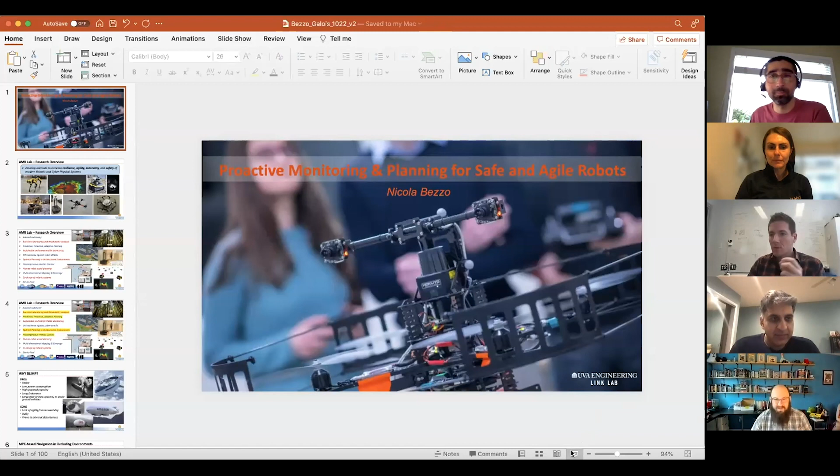Nicola, you are first. By the way, before we start, I kind of want to apologize, but my voice is a little bit scratchy, so I'm gonna sound a little bit like an old man today because I have a little bit of a cold. It's not COVID, so that's good news, but still, okay.

So, okay, great, thank you everybody for having me presenting today. Although I don't work on blimps, a lot of research we do in my group actually relates a lot to some of the problems we discussed yesterday. So I'm going to go over some of the core things we've been doing recently that fit very well with what could be work, for example, on blimps.

Let me first give you a quick overview about what we do in my laboratory. I'm going to minimize this so I can see. So with my group, we work in robotics.

We are primarily working on motion planning. The whole goal of my team is to increase autonomy of autonomous systems, to make them more resilient, agile, and safe as they move through different types of environments and deal with different types of problems, could be cyber attacks, or could be disturbances or failures. In this slide you see some of the robots we're using, and in the next slide I'm going to show some applications, some related to Spot, some related to aerial vehicles. We'll see how much I'm able to cover in half an hour.

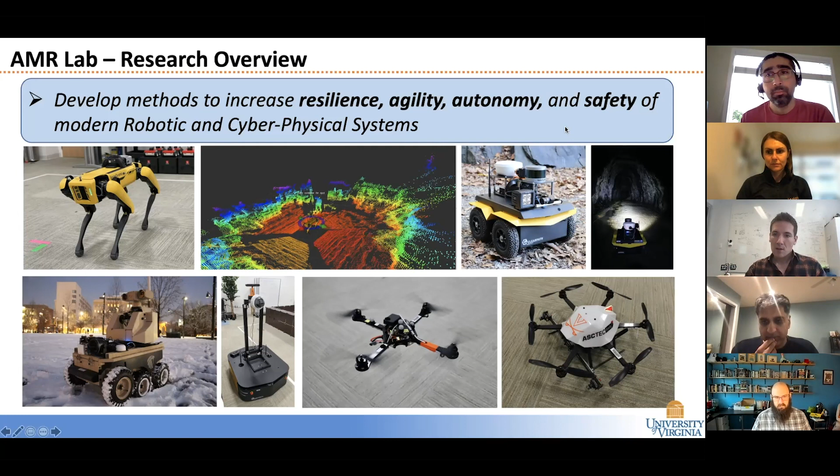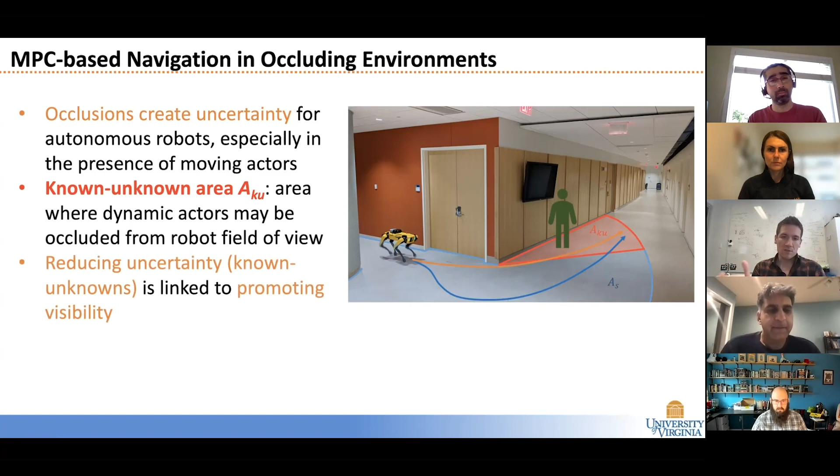So you can think, for example, that if it's the middle of the night, the robot could cut through this corner. But if it's a busy time of day, perhaps a better motion would be to promote visibility, to move in a way so that you gain more visibility around corners. So the idea is that if you want to reduce uncertainties, this is also linked to promoting visibility.

We would like to create a strategy that can do that autonomously, so the vehicle is able to deal with any type of environment. So that's the problem: how we can combine safety, visibility, and speed to make a robot more agile and able to deal with this problem you encounter in cluttered environments.

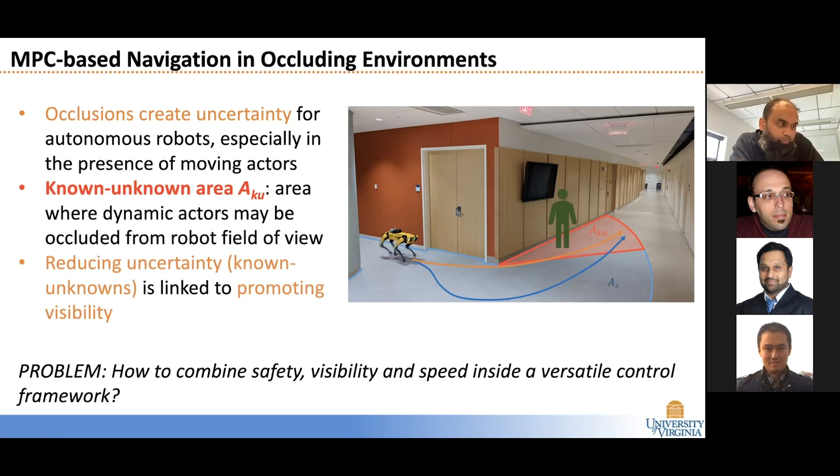So the first attempt to solve this problem, to minimize this known unknown area, was to use MPC. We've been talking a little bit about MPC, but the idea is that we have two competing objectives in this specific formulation.

We have one objective that is to make the robot go faster. By changing this waypoint, you can modulate the velocity at which the robot moves through the environment. Then we have this extra term added to the cost function, which tries to increase visibility around occlusions. In this specific case, that was dependent on the corners you encounter in an indoor environment.

So the first work we did on this topic was, again, focusing on indoor environments where we have corners, and trying to see if we could leverage the corner to approximate this known unknown area. We found a function that approximates really well this area that's being found whenever the robot is moving around, this known unknown area.

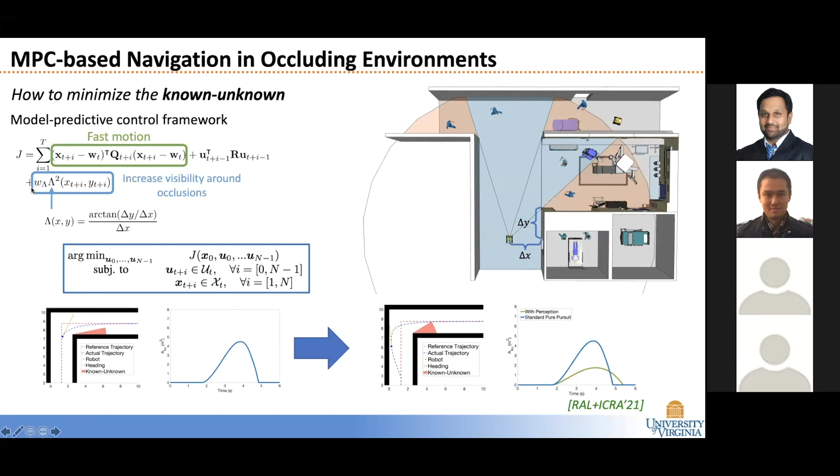Anyway, if you run this model predictive controller, that's the overall effect you obtain. If you don't do anything, if you put the weight for this visibility term very low, the robot just doesn't care, it just goes around as any other robot does right now.

By adding this visibility constraint, you see that the vehicle actually does what we like: it's able to scooch over, it's able to actually change its path. And while it's doing that, as you can see from this graph, it's actually lowering this known unknown area. So with respect to the other simulation, you see that the vehicle is able to improve the situation.

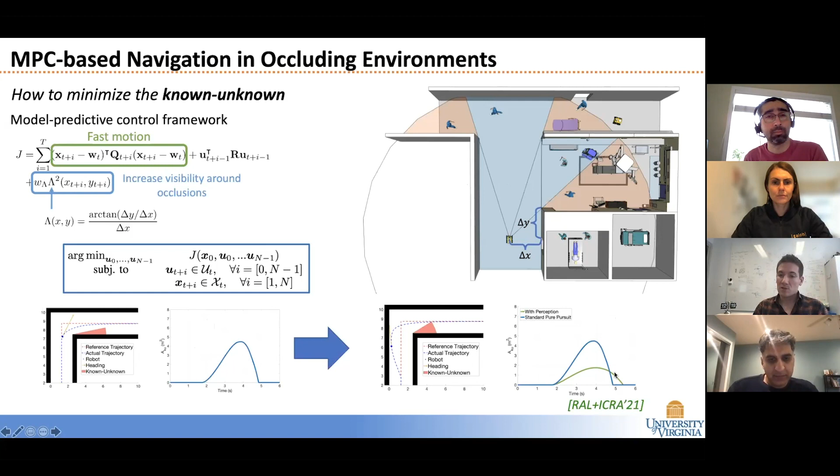To deal also with the unknown, we build an occupancy likelihood around the corners. So we build a model that tells us how likely it is that there is a person around the corner. This model is probabilistic, using an occupancy grid mapping technique.

At the end of the day, what we're trying to do is bring a model that tells us if somebody is there or not, which could depend on the time of day or previous notions of your environment. Based on these probabilities, we can find the expected distance to collisions, and since we know the dynamics of our system, we want to make sure the system can stop or react from any point if a person pops up from that corner. Based on that stopping distance, if violated, we adjust the weight of our MPC so we can move with more agility around these occlusions.

Let me show you an example. In this part where it's white, everything is safe, we're assuming there's no problem, no people around, it's known that everything is safe. But when we reach this corridor, we know there can be people that can cut through this corner.

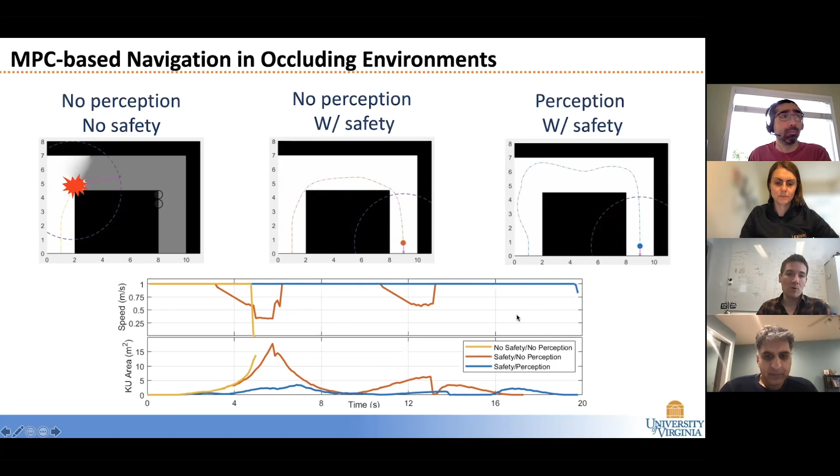This again is the same case as before, but now with perception. Again, we see that we're able to improve visibility, the known unknown area gets reduced, and the speed for this last one also gets improved. We can go a little bit faster around the corners.

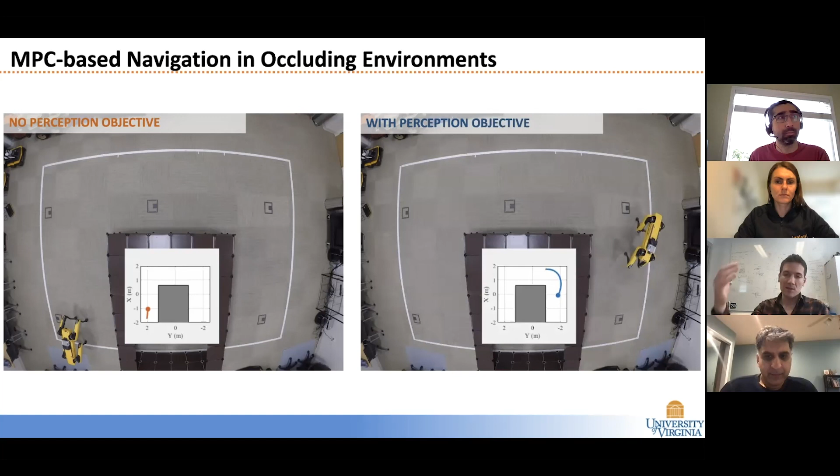If we add perception, you see that spot is able to figure out that it needs to take a longer path so it can see better around this corner. By doing that, it's also able to maintain safer and more agile motions in this cluttered environment.

So this, again, is an example of how we can deal with occlusions, and this can be applied to any type of vehicle. But the way we're moving forward on this research is to include more vehicles.

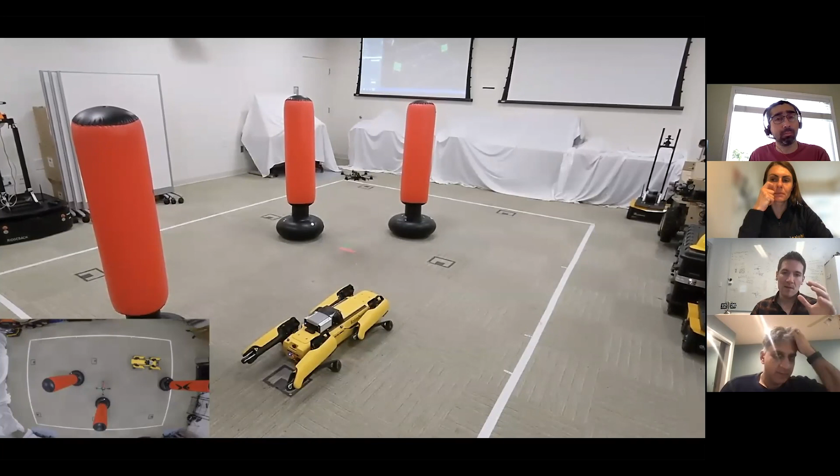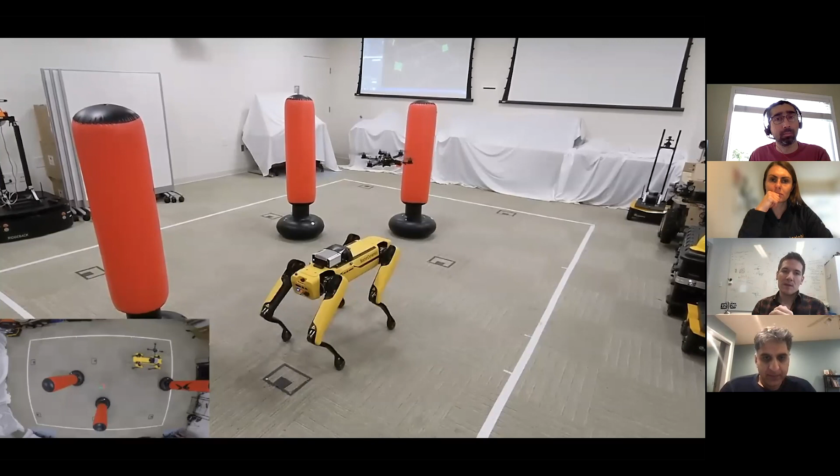So instead of only one vehicle, what we're thinking is something like this. This is just a prototype, not finalized, but the idea is: can we have, for example, a quadrotor that can move forward and provide some information to the ground vehicle that is in the back?

In this case, we are not doing that yet, it's just following, because we're prototyping this behavior. But the overall idea would be: can we have an aerial vehicle that moves a little bit faster in front of the vehicle and provides information about, for example, is there anybody around this corner, or is there any object? Then we can pass some of that to the ground vehicle, so it's able to be prepared and proactive as it's taking these corners and moving around.

So you could think, for example, that instead of a quadrotor, you could have a blimp flying way above that's able to inspect a larger area, so it can inform the ground vehicle about possible other vehicles or things around these occlusions.

Building on this idea of having multiple vehicles, we've actually been doing something applicable to blimps. It's similar to what I was talking about, but the idea is: can we have a ground vehicle, or a base station, or a blimp, that can assist an aerial vehicle or any other vehicle with limited capabilities as it's moving through a cluttered environment?

So the idea is the following: we have, for example, this aerial vehicle, this drone, that is trying to move through a cluttered environment.

And it can use only local field of view, so it's limited in what it can do. And because of that, it typically tends to move slowly if you're trying to move this vehicle through a cluttered environment. So the idea we would like to enforce here is, can we actually use a base station?

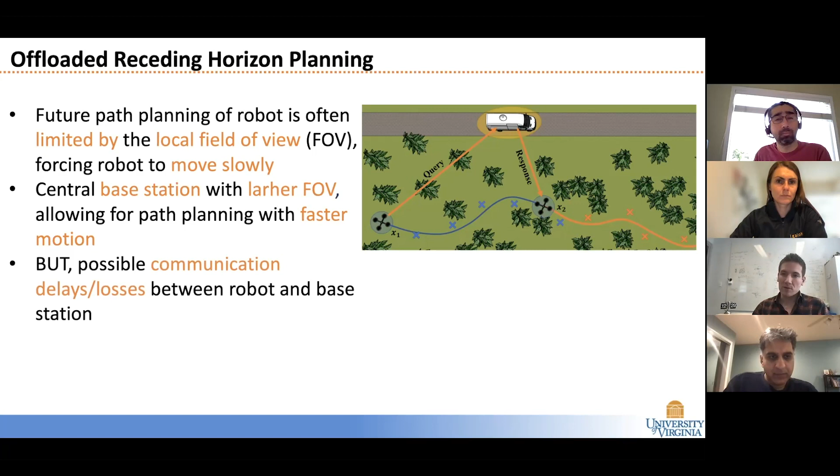So that's the idea. But as you can imagine, one of the problems with this technique is that we need to deal with communication delays, there are losses. So we need to figure out a way to deal with the fact that there can be issues with the communications. That's sort of a problem.

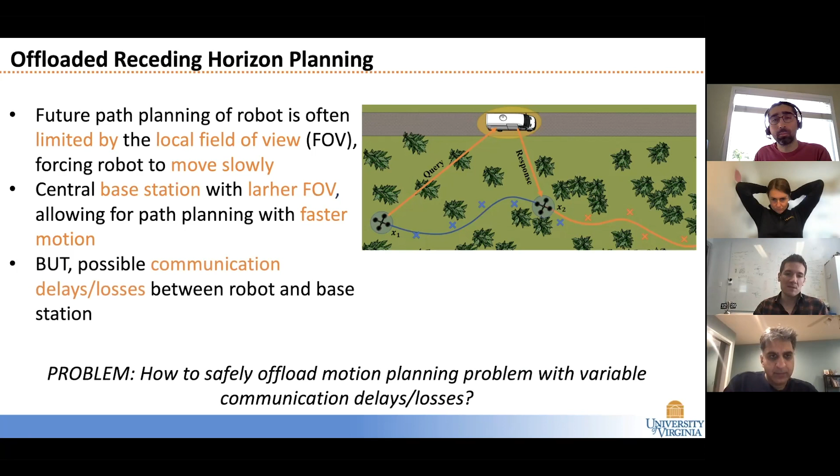So we would like to make this smaller aerial vehicle move faster for a cluttered environment, while offloading computation to a base station that can provide more information. So how do we solve these problems? This is the overall idea.

We would like to still use an MPC-like approach, and that's the reason we call this technique receding horizon. But instead of providing input to the system, to the quadrotor, which would require very high frequency broadcast data, we instead broadcast a waypoint to this aerial vehicle.

So instead of having a receding horizon controller running on this scheme, we run what we call receding horizon planning. So the base station, what it's trying to do here, is not sending very frequent information about the input of the drone, but sending waypoints instead. And then we leave the low-level controller on the drone to actually go to this waypoint.

And that's the reason you see that these waypoints play out in a strange position, because they're actually time waypoints. So by providing these time waypoints, which are less frequent, what happens is that the low-level controller tries to go to the first waypoint, then switches to a second waypoint, then a third, a fourth, and so on.

But by doing that, we recreate a similar behavior as if the station were sending very frequent input like an MPC to the quadrotor. So by doing that, you're able to reduce the communication package that you're sending. And by reducing the frequency, we are also able to deal a little bit more with the problem of delays.

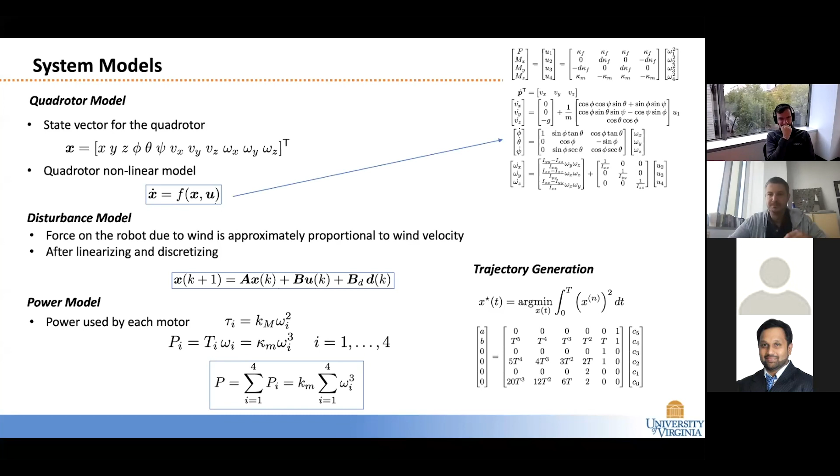To do that, we had to use a correct model of the system. We built equations of motion for our aerial vehicle, considered disturbance models, power models for our systems, and even how we build trajectories. We used all this deterministic information to predict what is the worst thing that could happen.

One of our first approaches for this runtime monitor was to build this reachable set as fast as possible at runtime, integrating information about the dynamics, disturbances, failures, and possible noise. Then you can predict where the system will be in the future, and you obtain something like this cone that tells you this is the region the system will be in, for example over the next couple of seconds.

If you're able to precisely get this prediction about the reachable set, you can answer a lot of different questions. For example, if you know the environment, you can assess the first time you might crash into an obstacle, or the earliest time at which the robot can leave a sensor's field of view.

Once you know that, you could relax certain computations. If we know we have, let's say, 10 seconds before we're going to crash with an obstacle, perhaps we can stop using a sensor, or stop doing certain computations related to that sensor, and focus on other tasks.

That was one of the first things we did, shown here. In this experiment, you see little quadrotors appear in RViz on the top left—these are the positions where the system figures out it actually needs to assess and use LiDAR information to predict where it's going to go next.

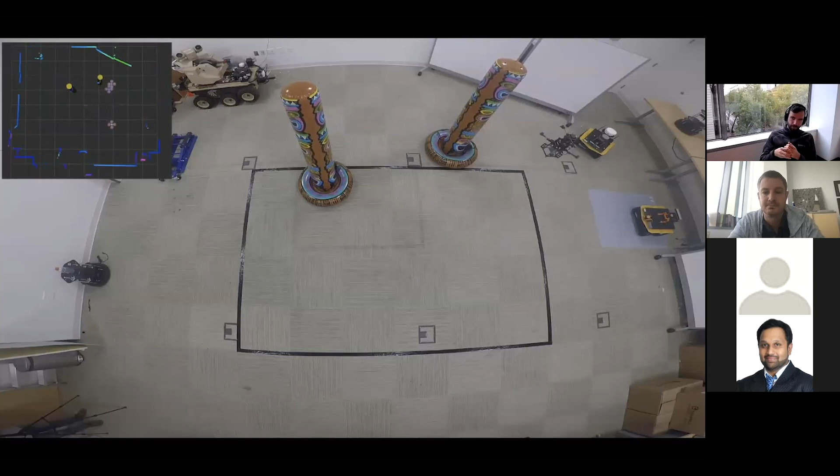What we did next—I'm going to have to spend a couple more minutes if I have them. Yeah, let me give you a 2 or 3 minute warning. Okay perfect, so now I might need that 2 or 3 minute warning right now.

But one approach that we've been doing, that's been working very well, has been bypassing completely the use of reachability at runtime. So one of the techniques we've been deploying is to use a neural network to directly give us safe and unsafe decisions.

We train this neural network using reachability analysis offline to be able to tell us if something's going to be safe or unsafe. We also verify this neural network using this VeriSig approach that has been developed by some of my colleagues at UPenn.

And then at runtime, we simply get the initial position of a robot and the final position, and quickly we can assess if a system is going to be safe or unsafe without even having to compute the reachability analysis at runtime. That's because we leverage reachability analysis during training.

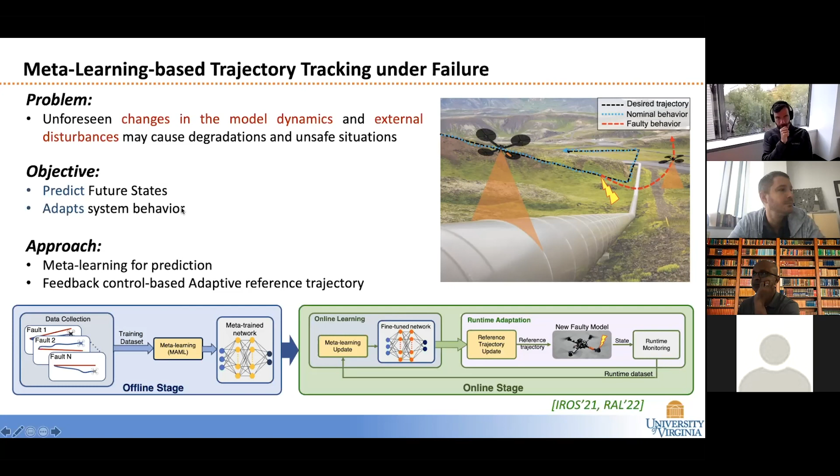And we are, as you can see, very busy doing a lot of work related both to monitoring and planning for autonomous systems. Okay, so good morning, everyone.

Today I'm going to talk about data-driven verification and synthesis of autonomous systems, which can potentially be used for verifying and synthesizing controllers for blimps as well, given that we heard yesterday their models are complex and sometimes even unknown. Let's see how we can attack this problem.

I guess for this audience I don't need to explain—autonomous systems are on the rise, becoming ubiquitous because of advances in computation and communication. But on the other hand, they also have very complex dynamics, and that makes it very difficult to come up with model-based approaches, which have been studied in the past few years.

So they are becoming more and more autonomous without human involvement. They are making their own decisions. And unfortunately, as most of us know, they are mostly built using heuristic approaches. Not all heuristic approaches are bad, but for real-life safety-critical applications, they can cause catastrophic events.

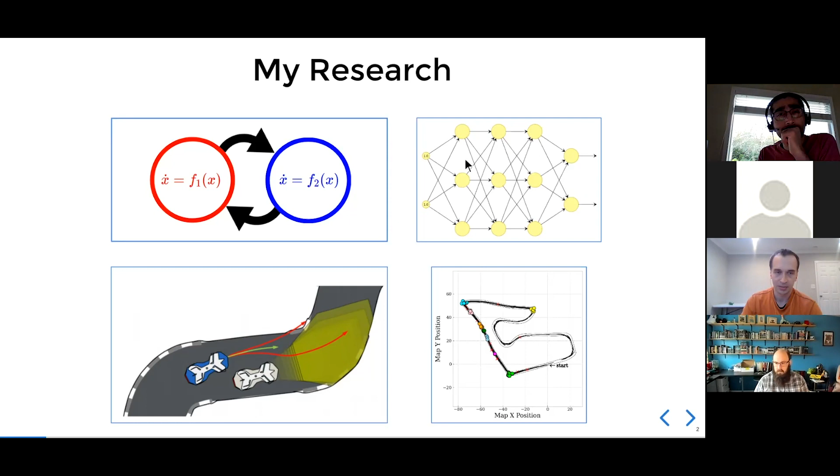That's an area I'm very much actively interested in as well. The things I want to talk about today focus more on these bottom two pictures, dealing with testing-based methods. The top one's reachability, you're doing set-based analysis. The bottom one was looking at this autonomous racing overtake problem, but in the context of test generation.

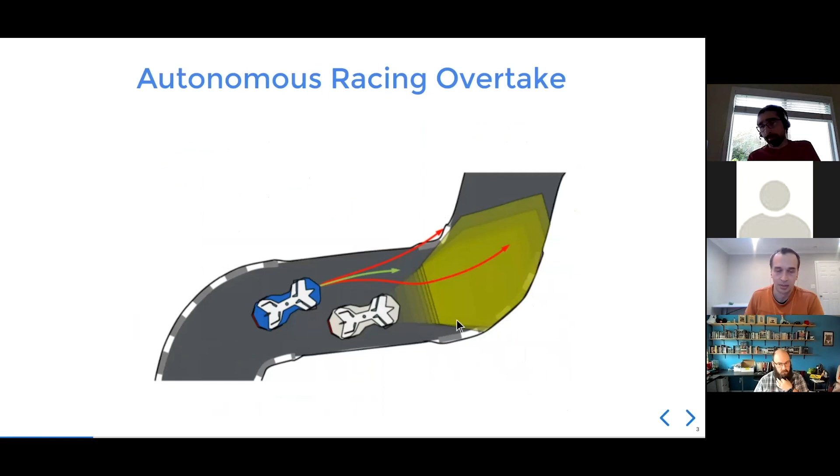Some motivation for this would be something like the Autonomous IndyCar Challenge. This is a real thing. People went to Indianapolis, the Indy 500, and they raced full-size cars actually last weekend. It's something that just happened, but it's been in progress for about the last 2 years, where initially over 30 universities were interested, with over $1 million prize pool. So people took this, I would think, pretty seriously. This wasn't just a grad student working on a toy problem.

Before I talk about the results of the actual race, I'm going to talk about the results of the simulated race. There was a simulated race in June for this particular Indy Autonomous Car Challenge. There's this high fidelity simulator that was provided, and 16 teams participated. You can see here the qualifying times for the single car races, and every car did really well. I think the top 14 out of 16 cars were within 1 second of each other in terms of the single lap time.

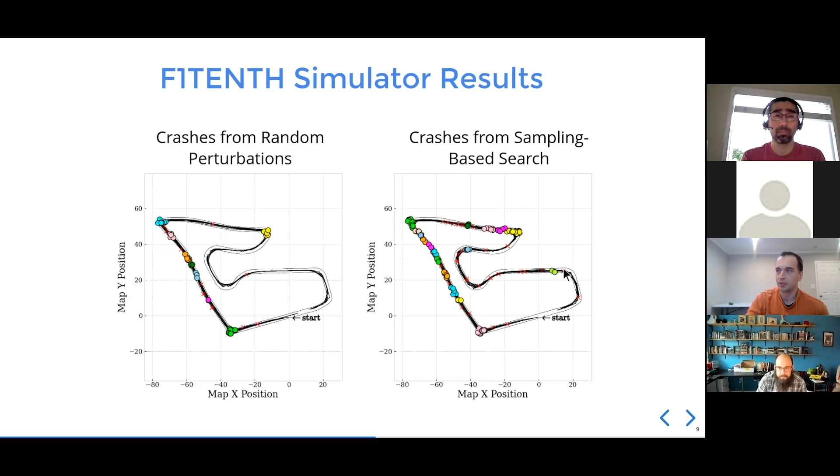So another thing we evaluated was 5 or 6 different control strategies, and they all worked to different degrees. Some of them are worse than others. But generally this matches the pattern found during the F1TENTH competitions.

They've still been doing F1TENTH competitions recently - they've been virtual, for people who can't attend places in person. The most recent one was also a couple weeks ago, and I think some of the results are that when cars are going close to the same speed, there's hardly any overtakes. So it's very important to be upfront at the beginning. This matches that - when cars are at the same speed, you can find a lot of collisions and overtakes. So this hopefully helps to develop better logic.

Okay, so enough about testing safety, high performance, safety-critical CPS. Here's some ideas I had for different blimp applications. This is my picture of a blimp.

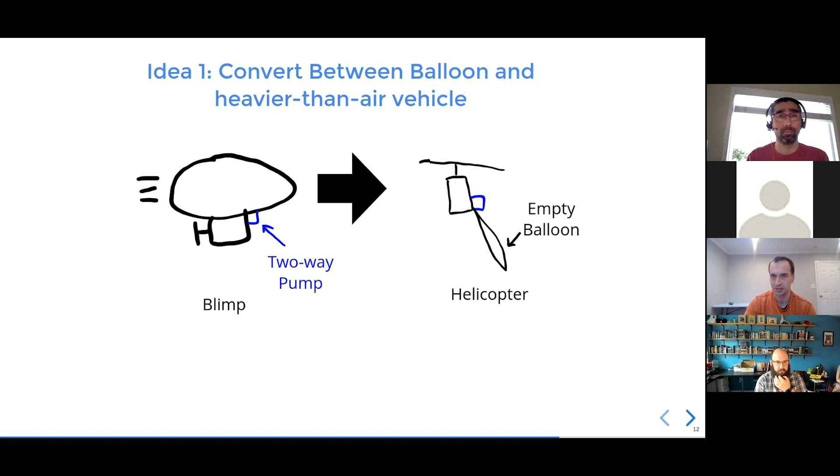So that's idea one. Idea two - you have this blimp, and you'll have multiple of these blimps. I guess I didn't know there were only 25 blimps in existence. So maybe this is a small balloon with a propeller on it, something we could build that doesn't cost $25 million. So what could you do with this?

We had multiple - I think coordination of blimps is an interesting application. My idea was we could put lights on them, these LED floodlights that we put on all of these. And because they're blimps and slow moving, maybe you could coordinate them, hook them up together, hook these up to a power source so you're actually getting power from the ground.

Then you could do things like put lights where you normally wouldn't have lights. Like if you're doing search and rescue at night, assuming you can control well enough and there's no wind interference, could you create lights over a forest? Or another application - if you have an outdoor wedding, your options now are you can buy a tent, but if you could suspend balloons that aren't too noisy floating above, you could have a light in a field. That would be kind of nice.

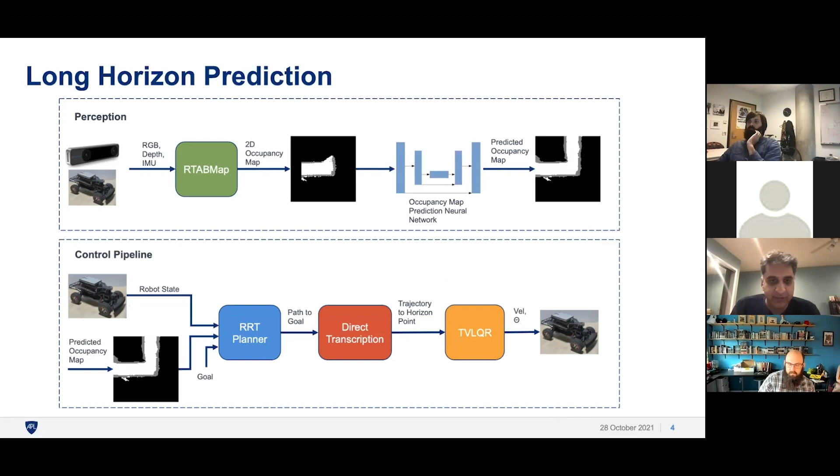So the work we're doing really leverages off-the-shelf planners, but kind of doing ablation studies: if I just looked at the horizon from the sensor versus looked at this predicted region, how can that improve my performance? The first thing we looked at was this information theoretic exploration.

If I make a prediction of the environment, can I use that prediction to efficiently explore the space better? So if I drop a robot in the middle of a room and want to build a map of the environment, can I make predictions of the environment, and multiple hypotheses of these predictions? If you have uncertainty associated with it, your multiple hypotheses will have variance. What I'm showing here is when you make these multiple hypotheses, you can look at the variance across these and use that as a heuristic to explore the space. It's kind of like, if I make multiple guesses and they all diverge in one region, that's probably the area I want to go explore.

So we exploited this property and used it to improve exploration strategies. But I think more importantly, really indicating this unknown region—can we leverage generative neural networks to predict occupied spaces beyond the sensor horizon, and then use that for higher speed navigation?

This is basically using an MIT race car with an RRT planner, comparing using just the sensor horizon versus leveraging the predicted map, and seeing if we can travel at faster speeds.

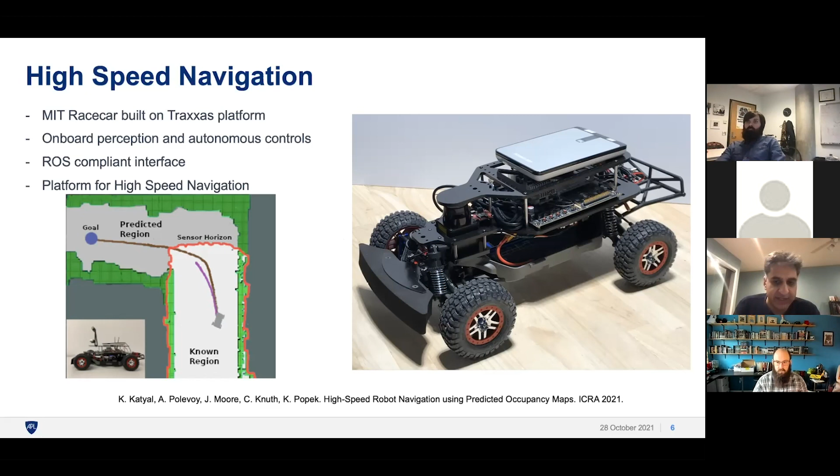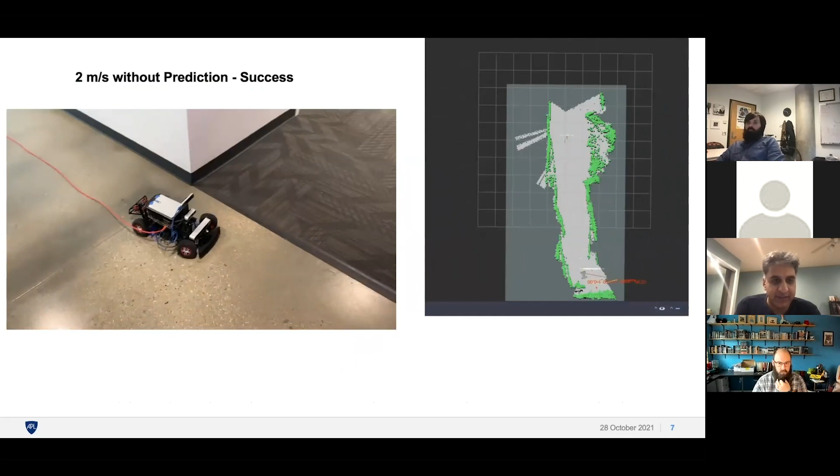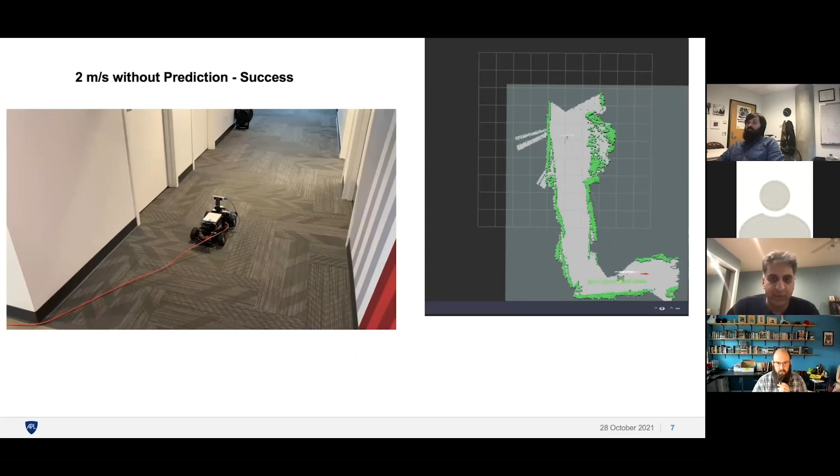Here's a couple of videos. This is showing 2 meters per second without using the prediction—it gets there, but it waves back and forth because computationally it's trying to build the map while trying to plan, so it updates and then recomputes a new knot point. It doesn't actually hit the wall, but obviously isn't very smooth.

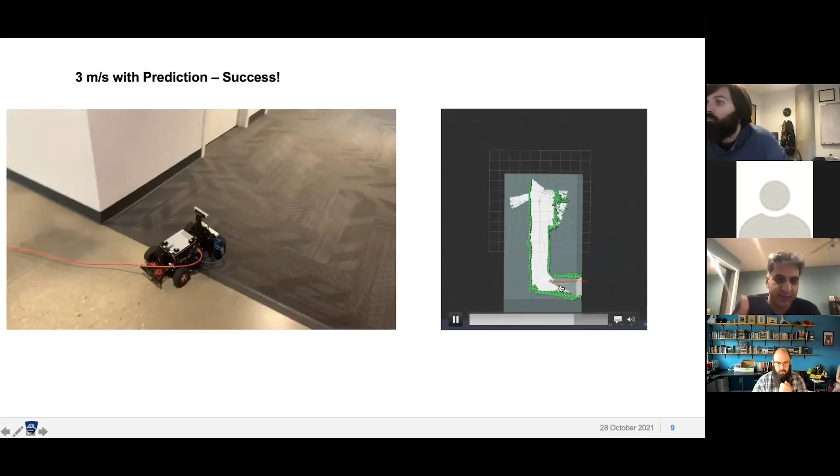Just to focus on applications to lightweight aerial vehicles, we've done work with occupancy maps for static obstacles based on the geometry of the room. But we've also extended this to dynamic obstacles like pedestrians, and how robots can use the prediction of pedestrians for navigation. I think what could be interesting too is thinking about this in an application of persistent surveillance—being able to predict future positions of targets and then learn where to look next.

Because you don't have the agility with a lightweight aerial vehicle, you need to do a better job of knowing where the target points are and having that longer horizon planning. So that's one area where I think this could be leveraged.

And also, being robust to environmental disturbances, right? Everything I showed was kind of static obstacles in the environment, but if you can predict what kind of environmental disturbances are going to occur, different weather patterns, different obstructions, occlusions, if you can model that and predict that, that could also improve the safety of these systems.

So the next thing I'll talk about is using deep recursive filters for out-of-distribution state estimation. With these lightweight air vehicles, it's really hard to control and estimate the state because of the nonlinear time delay dynamics. When doing state estimation for an aerial vehicle, you need some kind of mapping algorithm or SLAM estimation for knowing where the blimp is in the environment. So the idea is, if you're starting to get occlusions and a lot of noisy observations, how do you make sure that you're robust to that?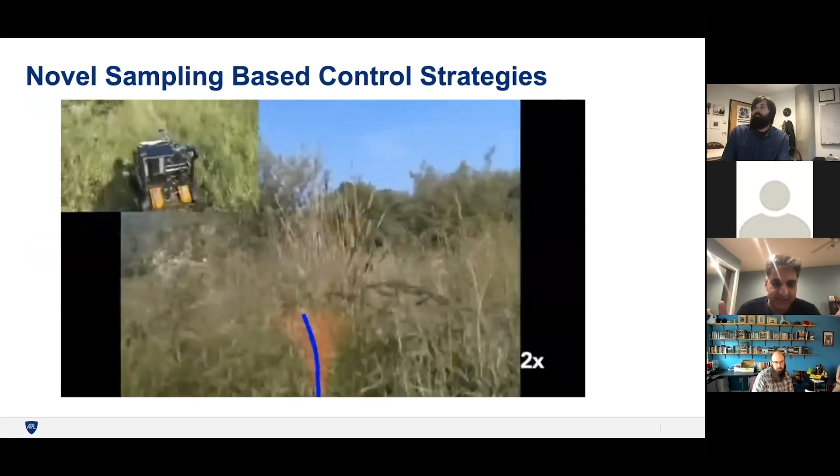Can we use a sampling-based strategy to navigate around different environments? Here we're basically trying to estimate where in the environment I can navigate through. If it's tall grass, I can go through it. If it's a big bush, I'm not able to go through it. Can I use the network to learn that? And then can I sample trajectories to find the one that's most optimal, going towards positions where I can actually traverse and where I cannot.

So again, I think not having a full pipeline of control, not having a perfect dynamics model, some of these sampling-based strategies can help with the vehicle, with lightweight vehicles as well.

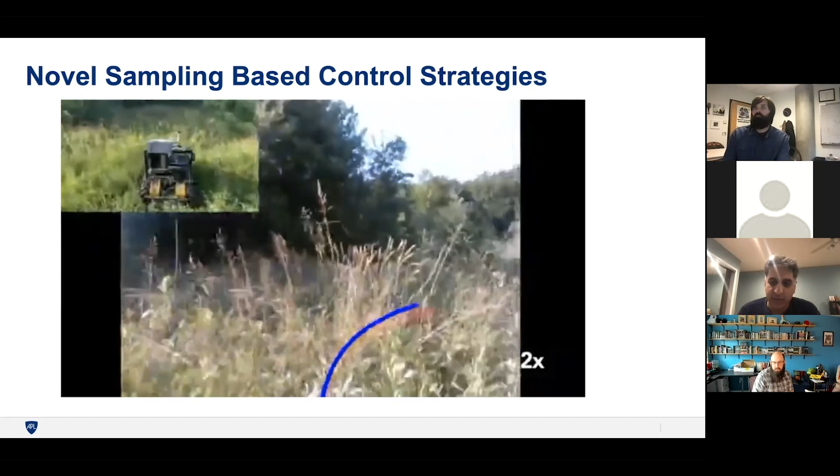So with that, I'll end and answer any questions that you might have. I had a question.

So when you talked about predicting the occupancy map and going through the corridor and predicting that, buildings are not so different, right? Do you really need the neural network kind of machinery? Because in the end, architecturally, buildings are very similar. If I were to look at... I guess I'm not predicting the global map, right? In that case it's very different, but locally, buildings are pretty similar.

Yeah, I would say that if you're just looking at office-like environments where you have right turns and long corridors, that's fine. But if you think about an atrium, that becomes much harder to model and estimate a prediction for. So that's where incorporating some of these techniques does help. I didn't show this video, but it does work pretty well on 90-degree angles, and also when you get into these wide open spaces, being able to predict these nonlinear, complex environments becomes more necessary.

I guess in that case there might be an option of just feeding architectural plans beforehand instead. Yeah, I mean if you have an architectural plan, you should definitely use that. This is more for a new environment that's never been mapped, and there's no pre-existing map. Exactly. And much like models of systems, I think architectural diagrams are probably at most 80% correct, so you'd want to have some doubt when using your floor plan.

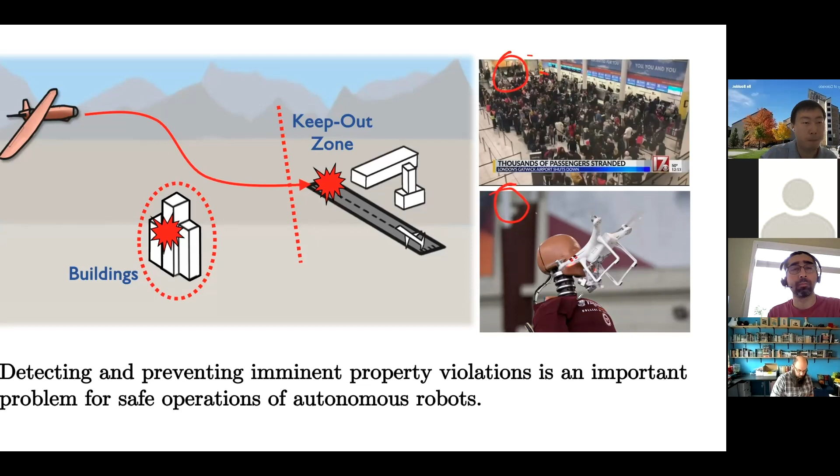A simple approach like extrapolation is not a good solution to this problem. Extrapolating the past trajectory is often likely to fail unless we know a specification of the task that a robot is performing. If we consider all possible control inputs of the robot, we get something like a reachable set. That is too conservative, and if the prediction time horizon is large, we get a bigger reachable set for this robot, and this is not useful information.

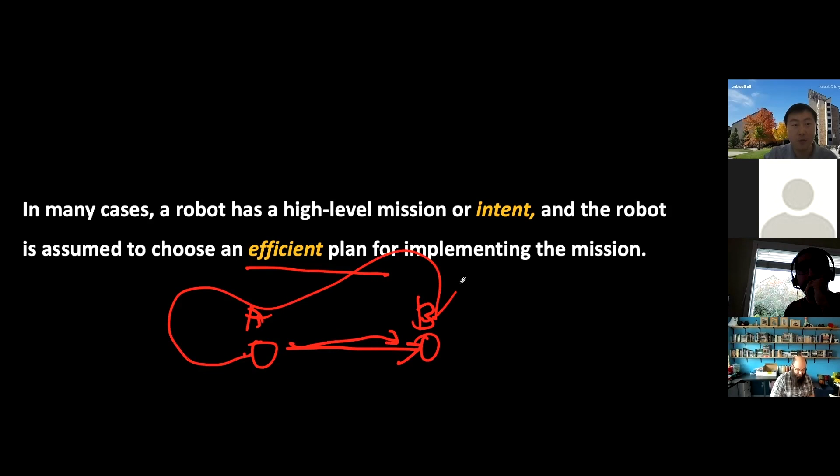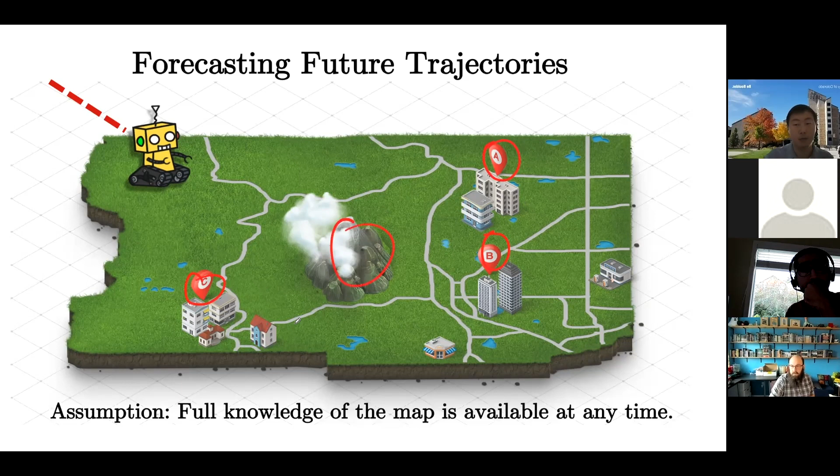So in this work, we use the robot's intent information for predictive runtime monitoring. Our assumption is that if a robot has a high-level mission, we are able not only to infer the mission by observing the robot's behavior, but also to use that information to predict future positions. So the ability to find the intent is key in this work.

This is the proposed framework. It consists of 2 phases: hypothesis generation and hypothesis evaluation. We first generate all possible intents based on map information, like H1 through H3, and generate an efficient trajectory corresponding to each intent. Then we evaluate intents based on the robot's behavior. To do this, we use Bayesian inference. I'll show more details in the following slides.

This is the detailed framework. Let's see this step by step, starting from hypothesis generation. Central to our framework is a map of the robot's workspace that is discretized into finitely many cells, so we use the mathematical model of a transition system. There is a finite set of cells, and the arrows represent the possible moves from one cell to the next by a robot. M, B, G represent atomic propositions: mountain, building, and goal.

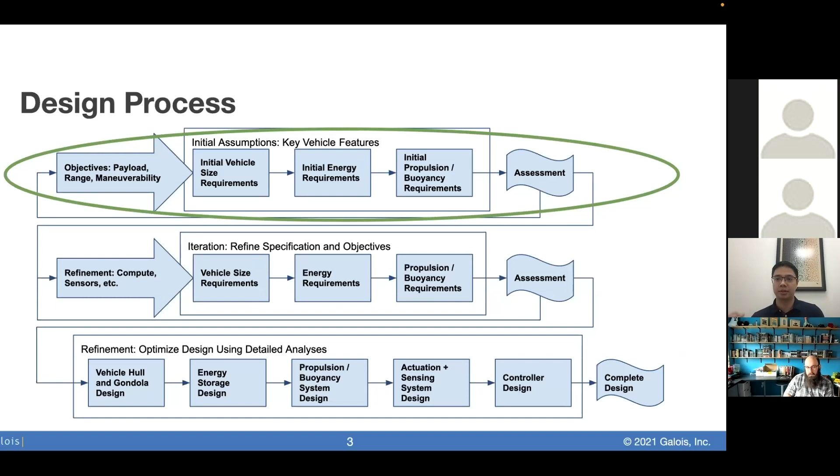So this presentation is more of a sketch than anything. We haven't actually gotten real requirements yet, and we haven't actually turned the crank, so to say, and created a final design. But we know notionally that we want it to fly around the Galois office, and so we can start giving ourselves length requirements.

We know that we want to give it a longer mission time than an off-the-shelf quadcopter, that it needs to be affordable because we want it to be accessible to other people, and so forth.

And the other one is the customizable payload. That is, how mindful do we have to be for applications? And we're targeting things like AI, ML, and sensing problems.

So for the next part of the design process, which is the refinement, we will start having compute requirements and electrical systems that we'll have to be mindful of.

And so, of course, there's a feedback here. Your vehicle size and your energy is going to be informed by this potentially. And so this will be the next part of the plan design process.

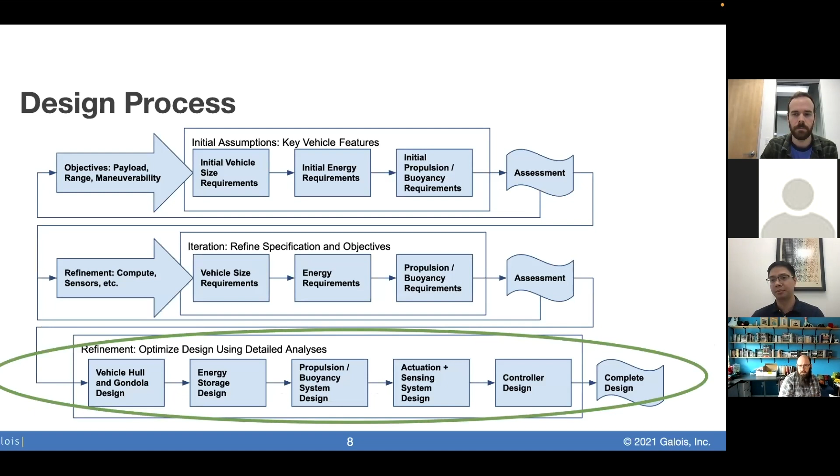So at Galois, we do have some tools that enable us to design UAVs. What I did for this talk was simply put together a blimp pretty haphazardly, meaning I didn't choose my parts in any principled way, and certainly not at the level we mentioned we would in the design process. But this is mostly to show a sketch of what this may look like by showing design artifacts.

So what we start off with is a corpus of components that have good properties to them, meaning we know what they are and they're well documented in data sheets. That allows us to build models because we have those features to configure it with. So we specify a component graph, and that translates to an assembly, a CAD assembly of a blimp.

This blimp is not really made for indoor use, but it's really made to show how you can design a blimp for the objective we created it for, which is to go over a 3-kilometer racetrack. So we hope to get efficiency both through buoyancy and the fixed wings that we add to it.

We also have a few actuators that we chose from our components. So that would be the motors and the propellers.

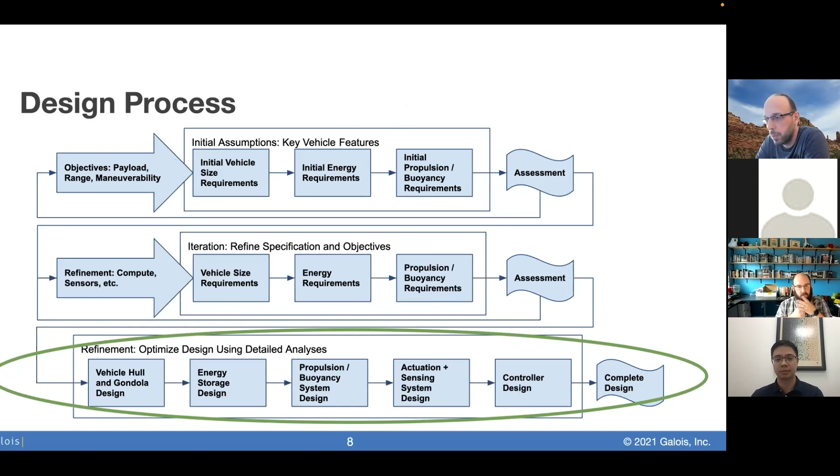Could you automate the whole process, maybe starting through a template? I'm sure you can define many optimization problems here, and our starting point is this component graph. Potentially parts of this are pretty easy to have AI pieces automate, like the composition of these components. This is a turn-the-crank pipeline as it currently exists, where we don't even have this CAD model directly. We have a graph that represents a component assembly, and we can go from that directly to performance results on this particular racetrack.

So once you've constructed your mission, you can then start in a more automated fashion, stepping through different designs and evaluating their qualities.

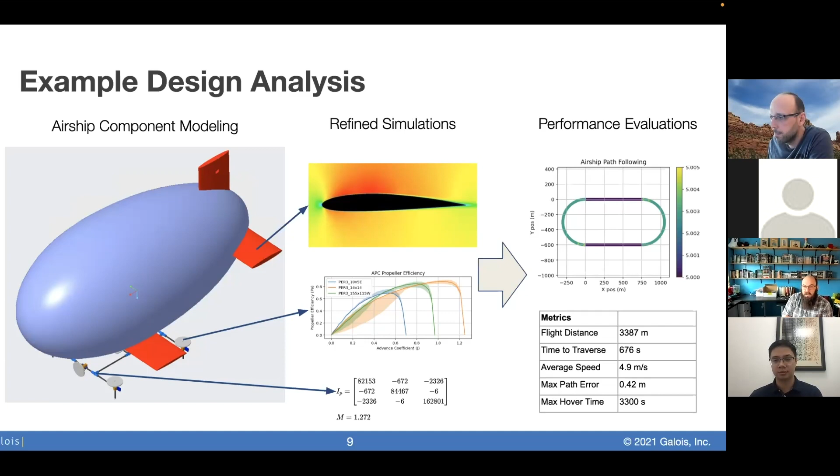I'll admit part of my interest in doing this work and looking into these early design questions is, in fact, how much of this can we automate? How much can we evaluate in an automated way, even if the design still has to be human? You may still want human insight, as Ethan said—he came in with intuitions about not wanting it to be symmetrical, looking at fixed wings for certain reasons. But if he can quickly iterate the loop, refining that to something more concrete and disproving his own assumptions, maybe he actually wants a spherical system, and he just doesn't know it yet. If we can provide those tools, that'd be great.

But I tend to think it's really helpful, before you build a tool to do something, that you should do it by hand once, so you know where the rough edges are and where things go wrong. So Ethan's going through it once, and we'll see how it comes out. I'm hoping that some of the modeling work Sam does helps us build it into the tools a little easier.

I'll also bring up one last topic quickly, the idea of symbiotic design. We definitely want to leverage human expertise, since automation typically explores very localized regions or just explores bad designs. So the question is, how can we have these automated pieces go out, do things, report their findings back in a meaningful way, or allow a user to direct them in a meaningful way? Perhaps that could also be a research topic under this umbrella.

So I'm very happy that you guys invited me. I think I've learned a lot through all the talks. One common thing I've seen through most of the talks is these talks have been about reasoning about blimps.

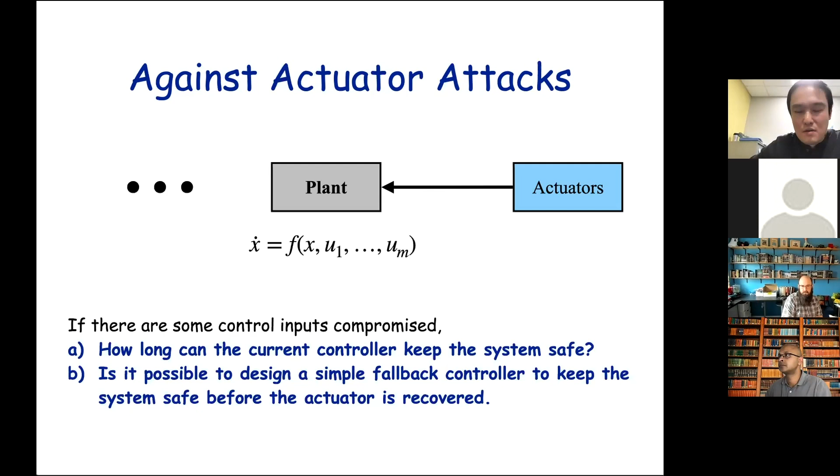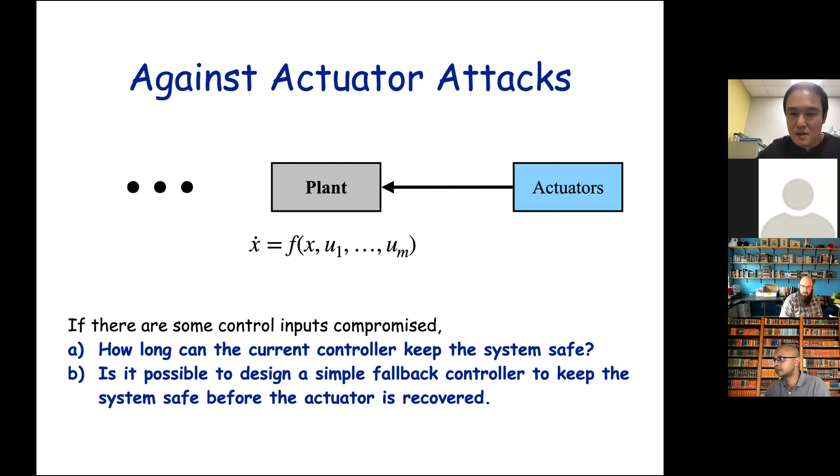This is very similar to what we saw, but the next one will be more interesting: is it possible to just use the remaining control inputs along with a simple fallback controller to keep the system safe before the actuator is recovered? This means that if we can know the dependency, or find the dependency of the variables and parameters, we may be able to answer these two questions.

So let's take a look at some results we have to answer the first dependency problem. We implemented a polynomial arithmetic framework called Polar based on C++.

What we are doing is we only study the first dependency problem, which means that we add the disturbances and try to find the maximum deviations which might be caused in the future states. And we apply this one to study the reachability of neural network control systems.

And this is based on a new version of the Flowstar Toolbox. Yes, Flowstar 2 is greatly improved. Actually, I'm still waiting for some results to put this online. The current version of Flowstar may allow you to do this online verification.